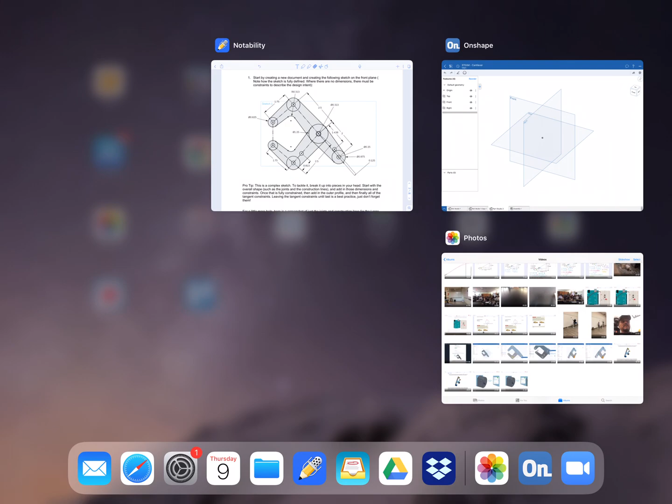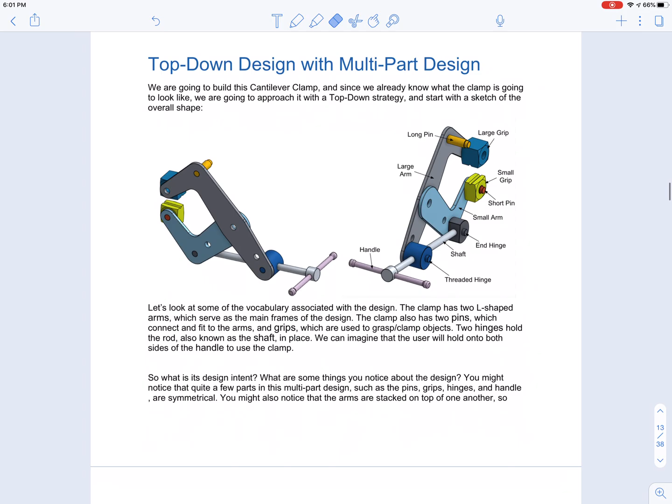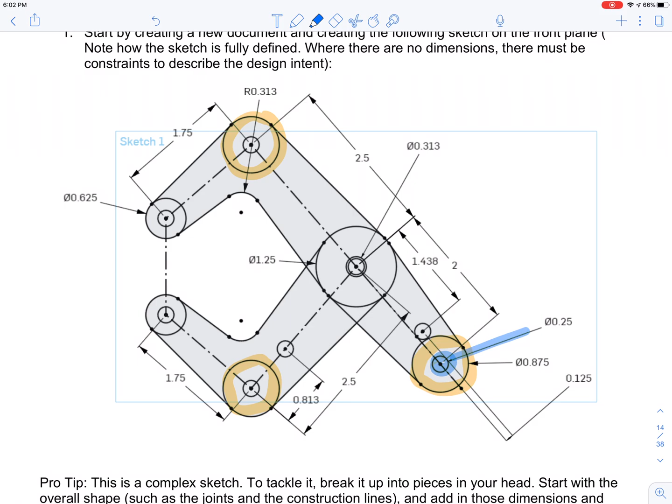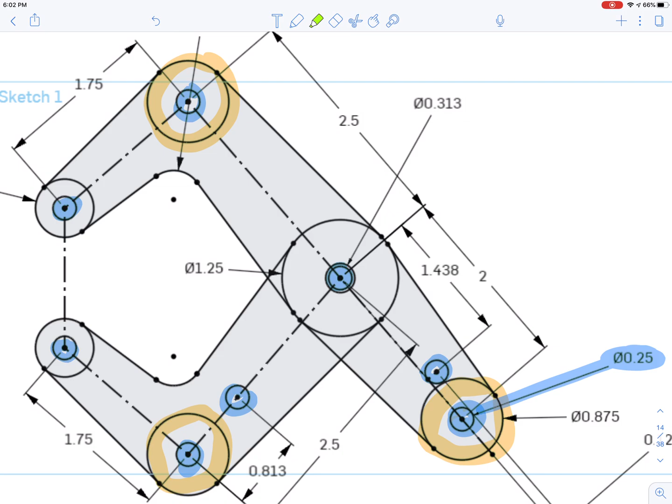As far as the smaller circles, this circle right here has a dimension of 0.25. But there's a bunch of other circles that do not have the diameters, but they're going to be the same size. This one, this one, this one, and you see that there are two circles here. The inside circle is also 0.25. The outside circle being 0.313, and that's that circle right there.

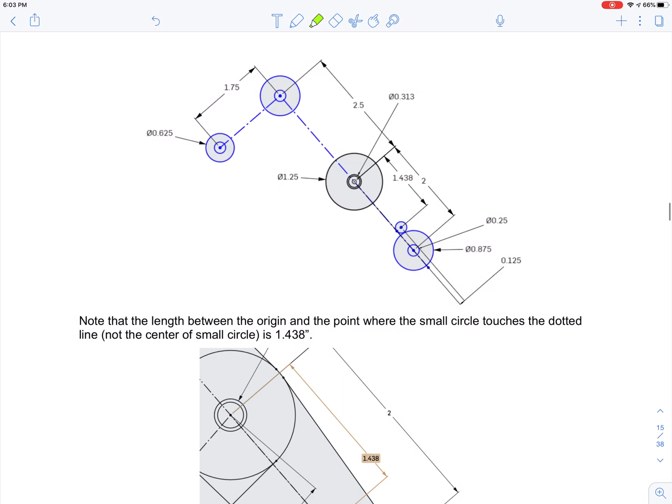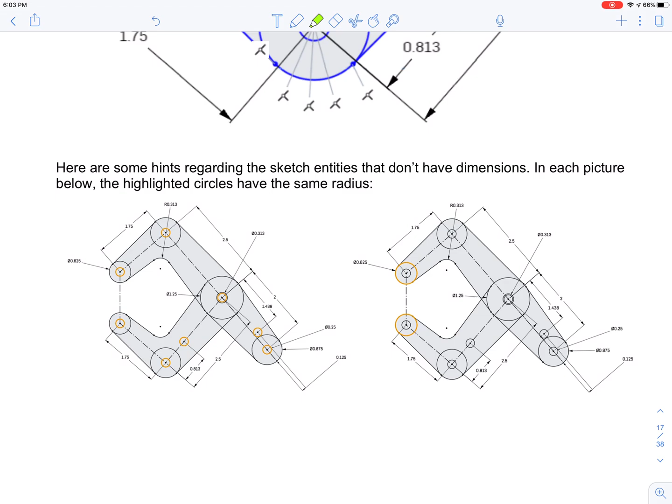If you find it difficult to notice that, the reason that I know this is because they actually tell you this further up the notes. They give you your dimensions for every little part, and further down they tell you, hey, if you didn't notice that, these are the circles that are similar to each other. You don't want to set the dimensions for each circle, because you're going to end up with a screen with a bunch of dimensions on it. Just set up the dimensions for one of the circles and then make the other circles equal in size to that one circle you dimensioned. I'll show you how we're going to do that.

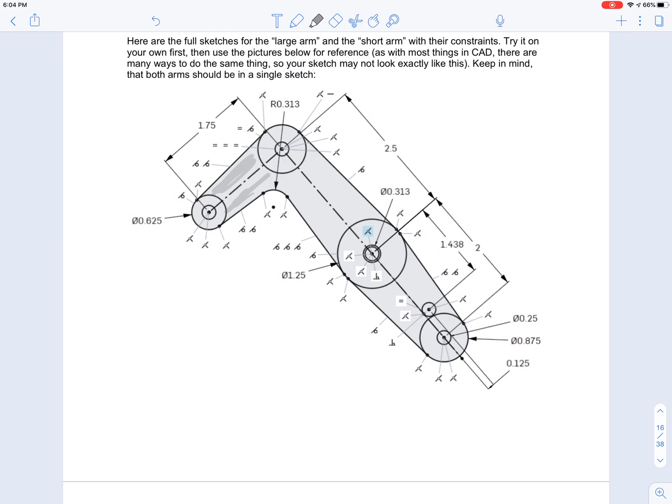One of the other things that they show you here, besides the distances between each of the parts, is the constraints. Your constraints have to be the right type of constraints for your drawing to work, because you can actually move the different parts, and I'll show you how to do that. You'll notice that if you don't do it right, then the drawing is going to get distorted. If you close out the drawing the right way, it should have that shade of gray that you see here. You should get that if your drawing is a closed drawing, and your lines will either be blue or black if your constraints are adequate.

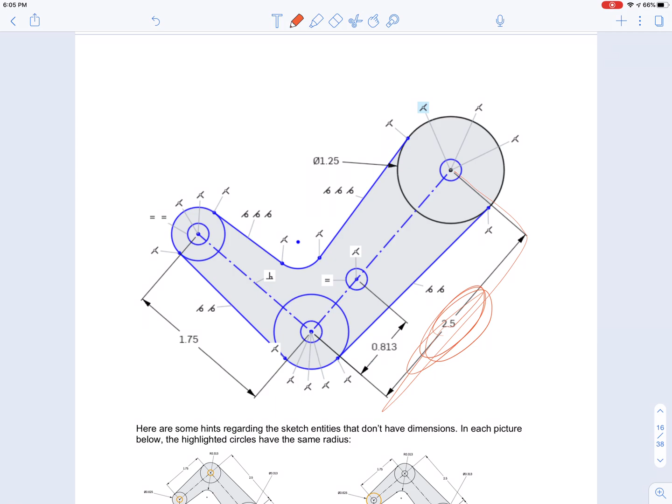If you're telling it to do two things that are opposed to each other, for example, you tell this to be attached to the midpoint of it, but then you tell it to be at this distance from the edge. The midpoint of this line is not 0.813 away from the edge. The midpoint is going to be here. So if you tell Onshape to put this circle at the midpoint of this line, and then you tell it this over here, it's going to turn red because it can't do that. Especially if you also tell it that this line needs to be this length. So those are things that you've got to keep in mind. When your constraints are going up against each other, you'll get a red line.

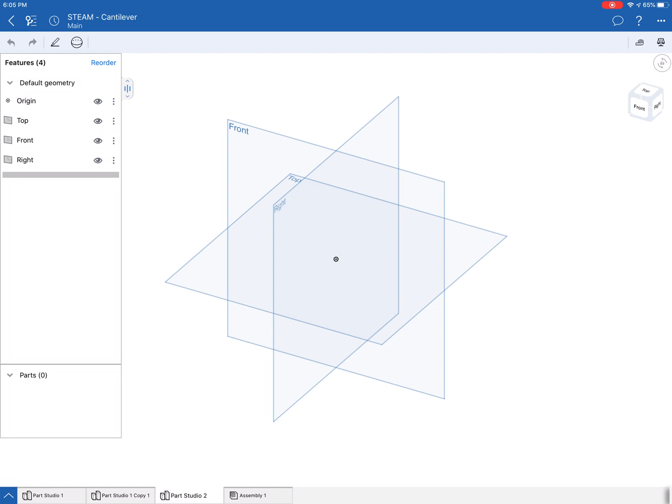Now, let's start our drawing. First thing I'm going to do is click on Sketch over here in the top left, the Sketch menu. It tells me select a plane. Now, to do this, I can either click on the front plane itself on the screen, or I can go to the menu on the left, the Features menu, and click on that, which is what I'm going to do. It immediately selects your sketch, and it asks you, what do you want to do?

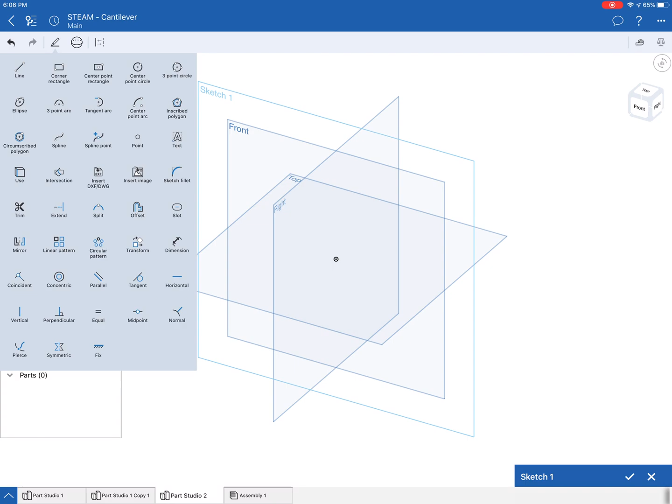I want to draw a circle. It's going to be a bit awkward for me to draw, but I can still do it because I want to start the circle at the center point of the origin. The origin is that point in the middle. So I can click on that, and then draw any diameter I want. It doesn't matter because I'm going to change it.

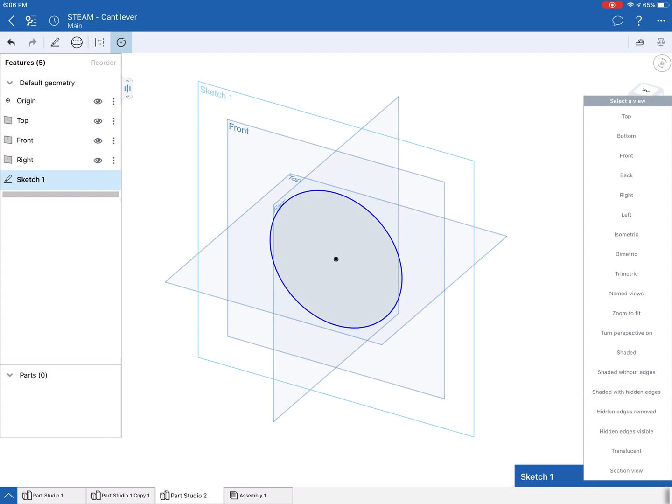It would be awkward to draw it like this, so what I'm going to do is get the front plane to face me. If you're on a desktop or laptop, you can manipulate that cube on the top right so the front face faces you. If you're on an iPad like I am, you can click on that and then click front, and it automatically sets up that way.

Now this little top circle to the top right that I'm going to click on is going to turn orange. That allows me to actually move stuff here without tilting the plane. So I have that circle. Now if I click on that circle, I can actually change its size.

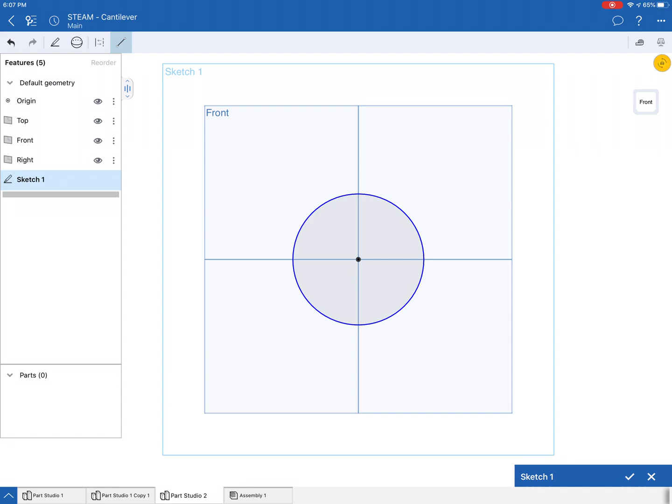Now what I'm going to do is draw a line. I'm going to draw a line, and my line's going to look like this. It's going to go from here to here to here. Just want to draw a line.

Now I'm going to unclick line because I don't want to draw another line as I'm changing this. I need this line to go from a regular line to a construction line. So I'm going to highlight it, and then click construction, this button right here. I'll click that—boom, my line's a construction line. Now I'm going to unhighlight it by just clicking away from it.

Now there's a couple of things that need to happen. I need to attach that longer line to the center of that circle, and I need these two lines to be perpendicular to each other. It doesn't matter in which order you do it, as long as you do them.

I'm going to set them perpendicular to each other first, so I click that line and this line. Then I click the sketch menu and click perpendicular down here. Boom, now they're perpendicular to each other.

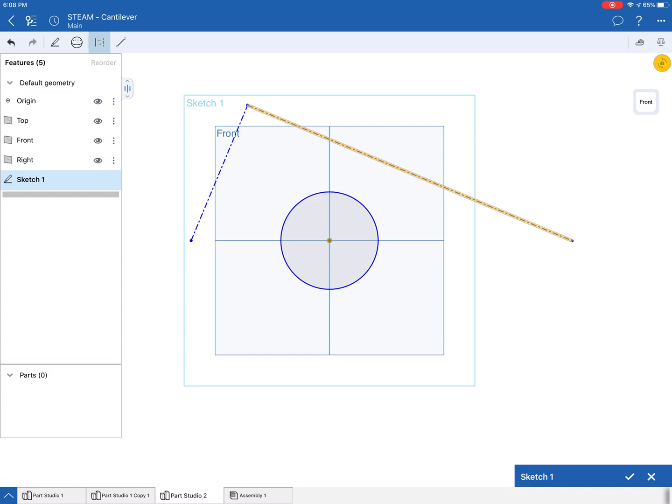Now what I want to do is make sure this line is going through the center of that circle. So I click that line and I click the center of the circle. Then again I click sketch, and now I click coincident. Boom—notice what happened there, right?

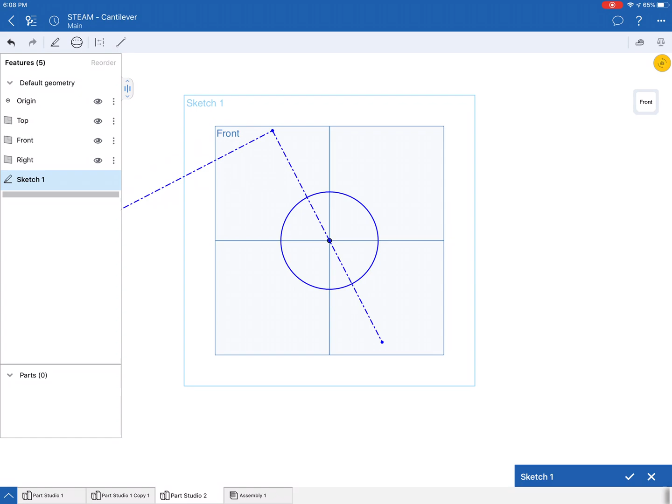Now I can manipulate this line. I can change all these different things and do all sorts of things here. It doesn't matter the size and all that, because I'm going to change that as I go.

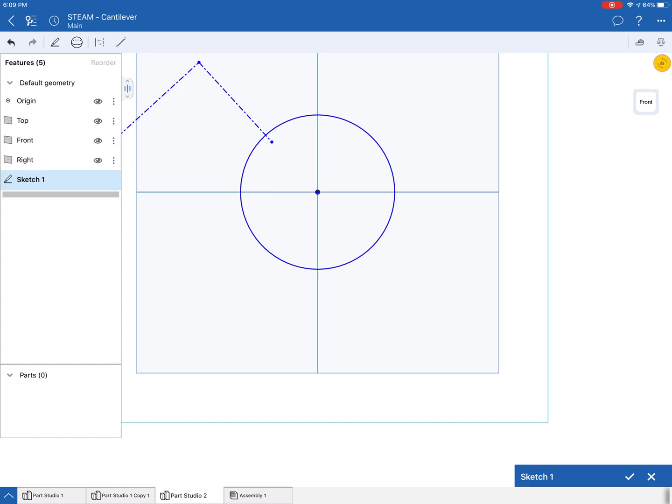So alright, I have that right there. Let me edit it a little bit. I'm just going to stretch this line over here like this, stretch it over here like this, and push it up—just creating some separation there.

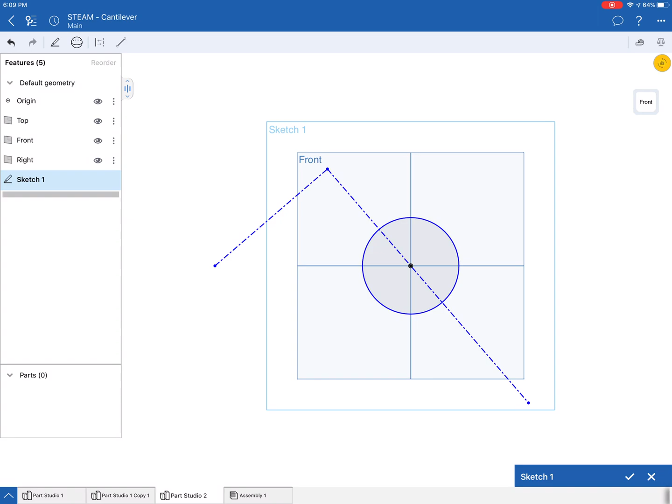Now I'm going to draw my circles so that they look something like this. I'm not going to focus on the size of them yet because I can change that later. So I'm going to click here, click center point circle, and begin drawing my circles.

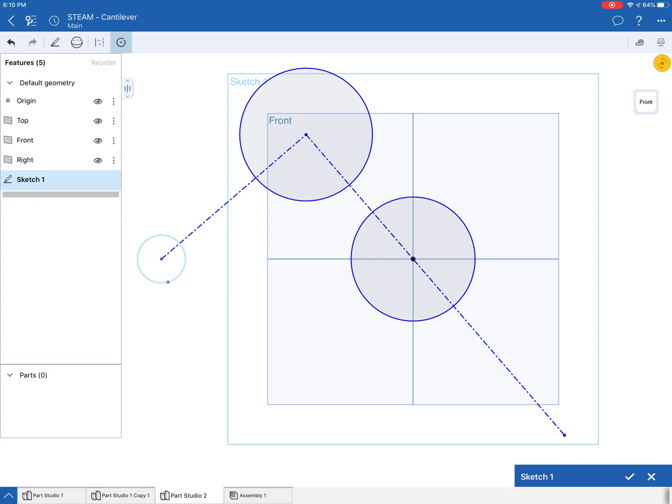I'm going to draw my big circles first—that's 1, that's 2, that's 3. Now I'm going to add my smaller circles. There are 2 circles in here, one here and one here, and then there's a random circle floating in the air over here. Okay, now I'm done with those.

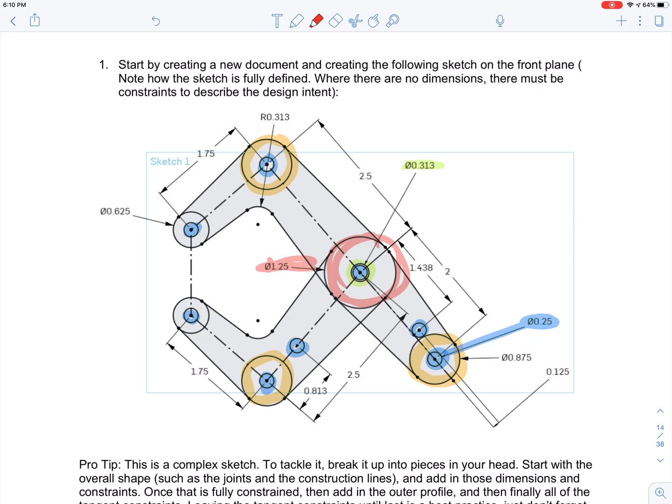Alright, now what I'm going to do is set the sizes of my circles. We have this base circle right here, the original one, and that's going to be 1.25. So I'm going to click on sketch, click on dimension, and click on the circle, and now I have this over here.

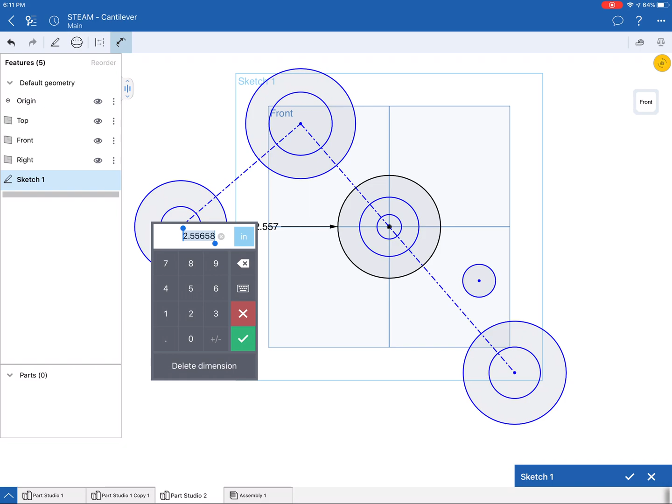I'm going to click on the numbers here, and that should pop up—it should be 1.25. Click OK, and that's all of it, that's going to change.

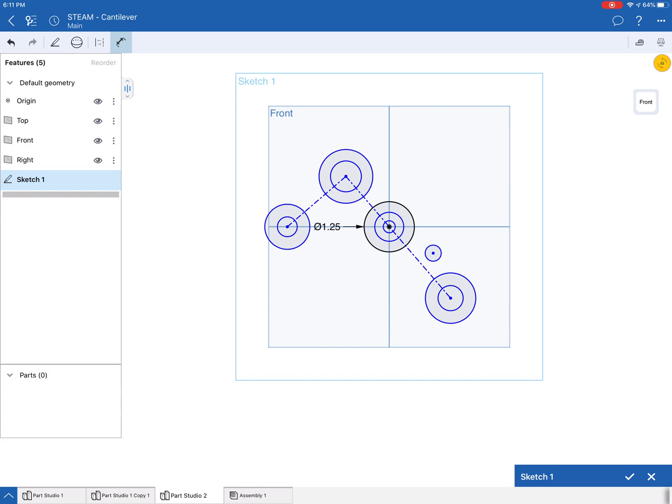All right, so now I have that dimension set. I'm going to work on the smaller circles now.

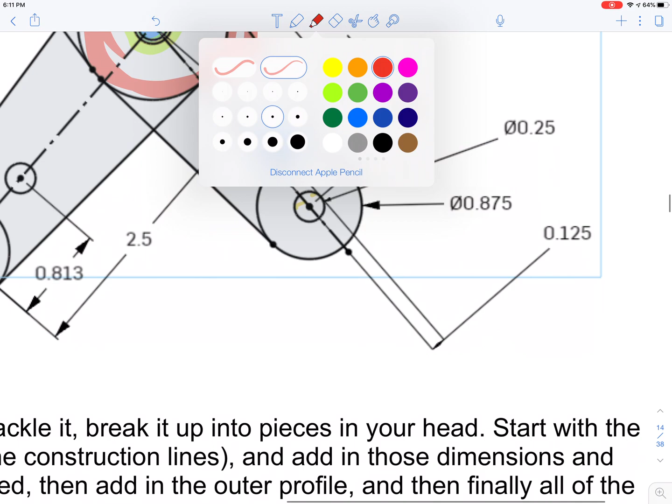As you see, the dimension still clicked up here, and I'm going to click on this one. Now this dimension has to be, let's click on this over here. This is supposed to be 0.25. So again, I'm going to click on that, click on the numbers, and it's going to say 0.25. Boom, right away. Once you click that, you see the dimensions turn black.

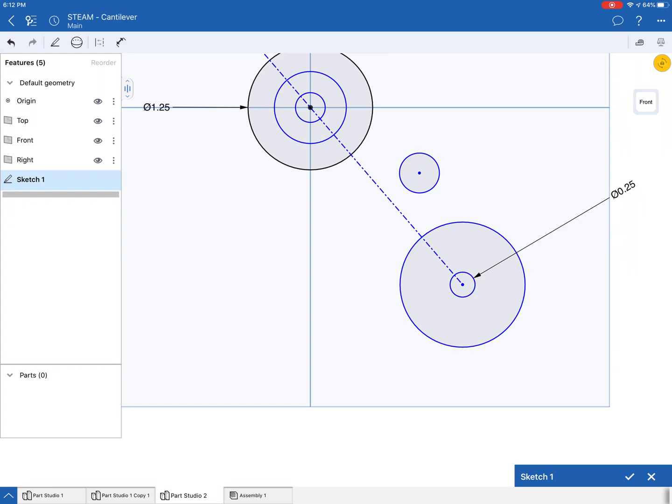I can manipulate that and move it anywhere I want. I can get it out of the way. And I'm going to change my other dimensions.

How am I going to do that with the smaller circles instead of clicking dimensions every single time? Well, I have those dimensions set already. So what I'm going to do is click on that circle and any of the other circles that I want to have the same dimension. Then I'm going to click on my sketch menu and press equal down here. And boom, automatically they turn the same size.

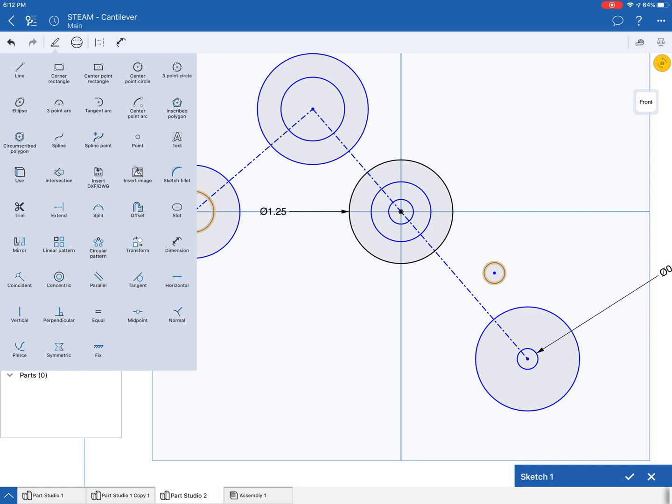Now I can click on this circle and this other one right here instead of clicking the original one, and again set them equal to each other, boom. And I'm going to do that again. This and this equal. And then the small one here with this one, and they're going to be equal. Boom, done.

Now I have my small circle set up. This one over here, I know this because I've done this a bunch of times. This dimension over here is supposed to be 0.313. Boom. You see, now it looks like our drawing over here. Okay, and that's what we're aiming for right now.

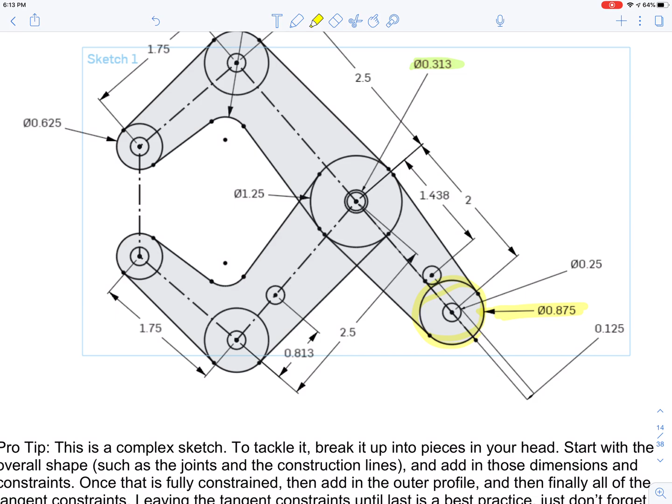So the next one that we're going to set up is this circle over here. The 0.875, which is going to be the same as this. And then afterwards, we're going to do that one over there. So 0.875, I'm going to click on dimensions, and I'm going to click on that circle.

And I'm going to click on that, and the number is 0.875. Okay, boom. Again, I want this circle to be the same size as this one. So I go here and I click equal. Done. Oh, and I made a mistake.

So I clicked on those two circles, and I got this dimension over here. I'm going to unclick it because I don't want that dimension. All right, now this circle over here, I want the dimension for the circle. So this is going to be, I click on the numbers, 0.625. Boom. And you know what?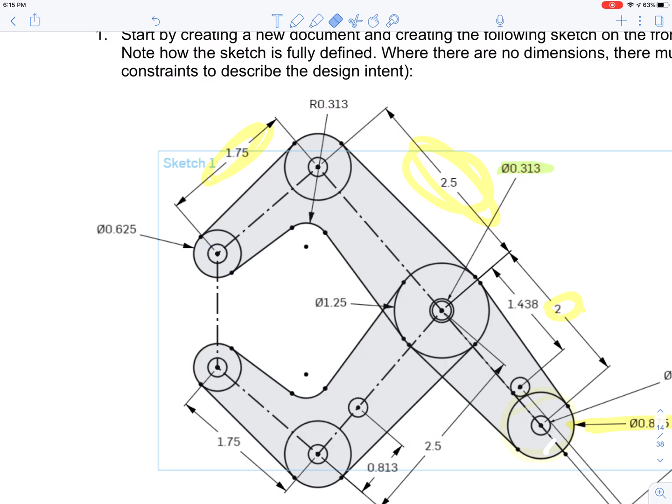So now, again, click on distance, and I'm going to click on the center of the circle and the center of the circle, and okay. Click on the number, it's going to say 1.75. Okay, boom. And now I can move it up and down.

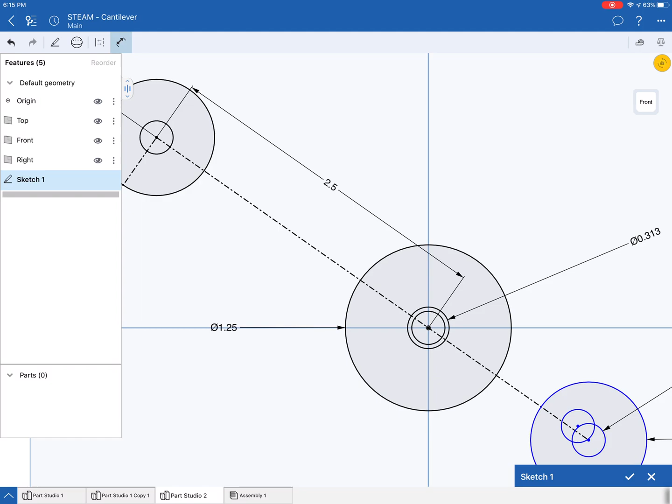I can put it wherever I want. Again, the dimension tab is still highlighted. I'm going to click here and here. I'm going to go up. I'm going to put it there, and I'm going to click on the number. I'm going to say 2.5. Boom. Set. I can move it wherever I want.

Now I'm going to do these two. Let me click this. I'm going to move this away so I can click on the right thing, and I'm going to move this circle out of there.

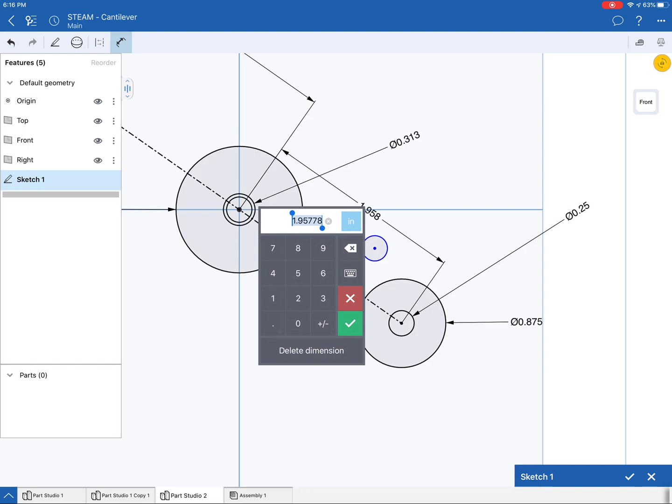Now the distance from the center to here, I'll click dimension and set the number to 2. It was almost that size. Then I'll bring it up so they're about the same position. You can fix that later, it's not that important.

I'm going to move this out of the way. The other thing I need to do is make sure that blue circle rests on that line. First I'll unclick dimensions, then click the circle and click that line, and now click sketch and coincident, which is this one right here.

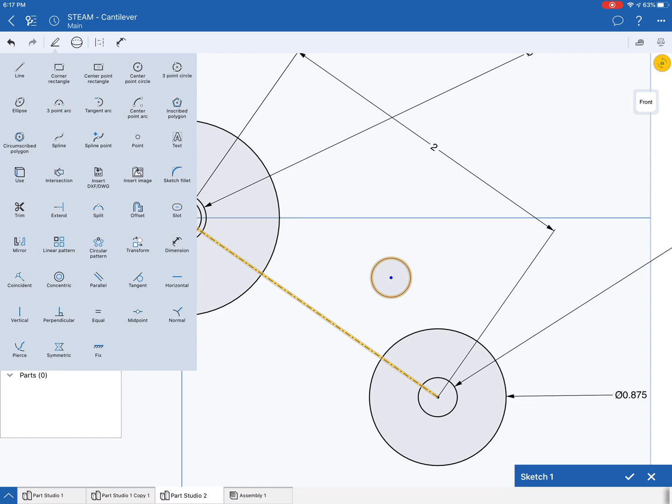My bad. I'm going to click the circle, click the line, and click on tangent, not coincident, tangent, which is this one right here. If you're taking geometry, you should know that tangent touches a circle at just one point.

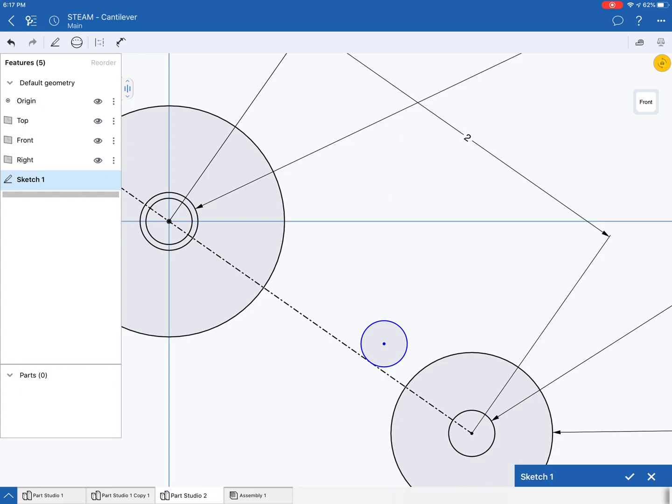So if I move this circle around, it's just going to be on that line. Had I not set it equal to the other circle, I could also change its size and it would still touch that line, but I can't change its size right now because I set this circle equal to the other one.

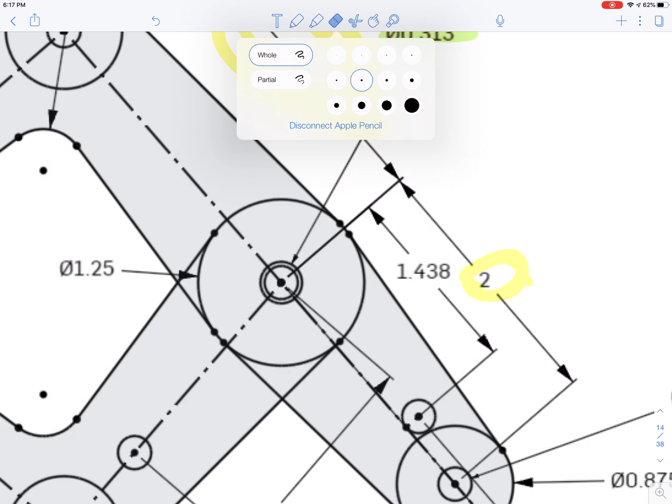Another thing I need to do is set the distance between this circle and the big circle over here, that blue circle and the original circle. I need to set it to 1.438.

There's a little trick here, you see this point I'm highlighting. I'm going to add that point. I'll click on sketch, find point, which is this one, and click around that area. It should immediately snap to it. That is my point of tangency, and it's immediately attached itself to it.

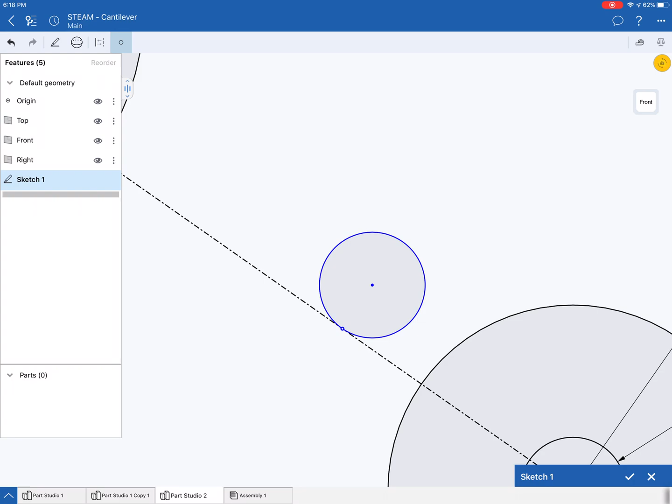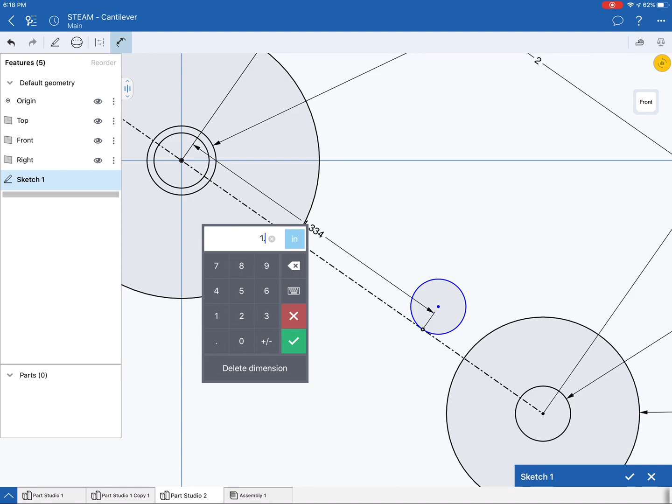Now I'm going to click dimensions again, click the center of the big circle, and click that point of tangency. Click the numbers, and again I'm going to check it's 1.438. So I'll set it to 1.438. Okay, you see what happened there?

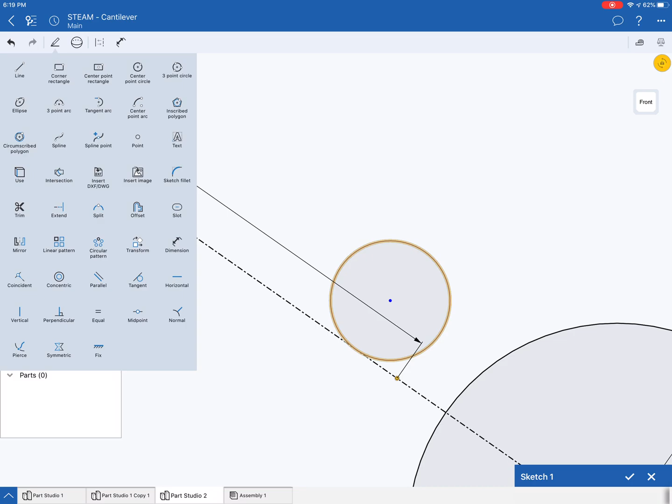The point moved, but not the circle. So now I'm going to attach this to this point. To do it, I'll click away from dimension, click this on point, and again click on tangent. Okay, not tangent, coincident. Sometimes there's a bit of trial and error. There you go, coincident worked.

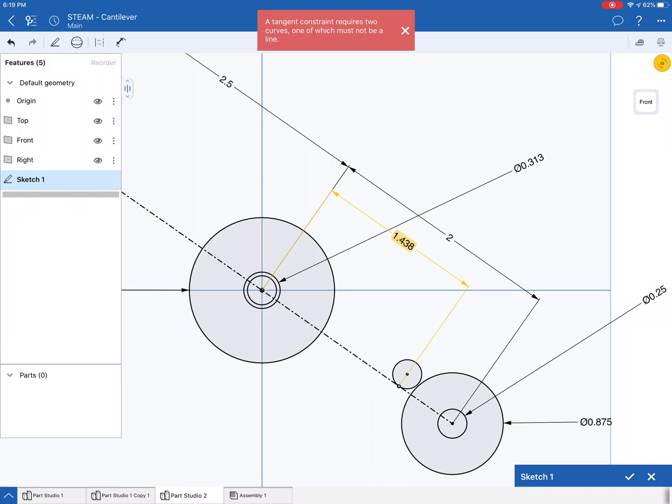So now our circle is at that distance, and I'm just going to move this out of the way so it's not part of the drawing. Okay, so now my circles are drawn.

Now what I need to do is build the rest of my arm. I need to build the actual body of the arm. So that's what I'm going to do.

One of the things you need to understand is that these lines are all tangential to the circles, even these to this circle right here. So I'm just going to draw the lines. As long as they're attached to the circle, it'll work. Then I'm going to draw the lines and ask them to attach themselves to the point of tangency, and automatically they're going to go into this mode.

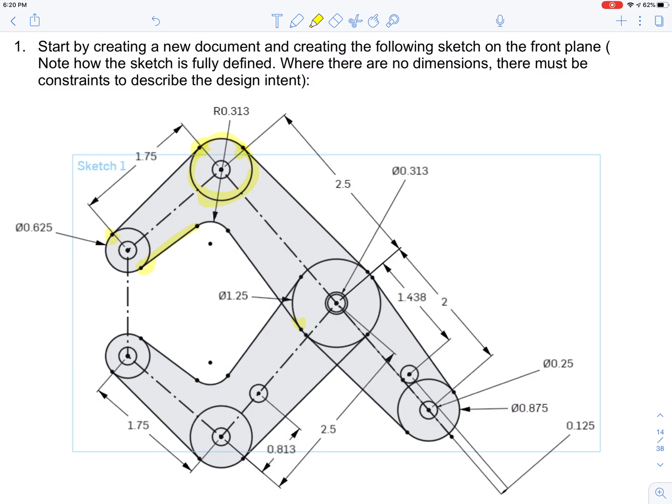Obviously this line over here is going to look more like this, just a straight line. I'm going to have a straight line here, you'll see, and then I'll fix it so that it looks like it's curved. Okay, here we go. Also, you'll notice how the inside of it is going to be shaded gray, just like these. As you can see, my circles are black because everything works out fine, right?

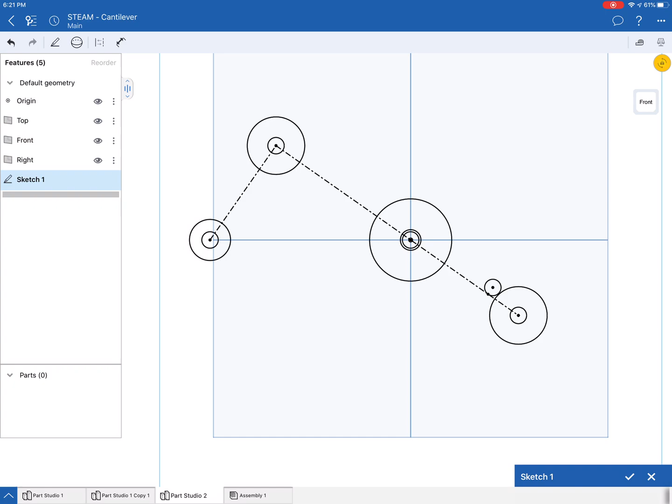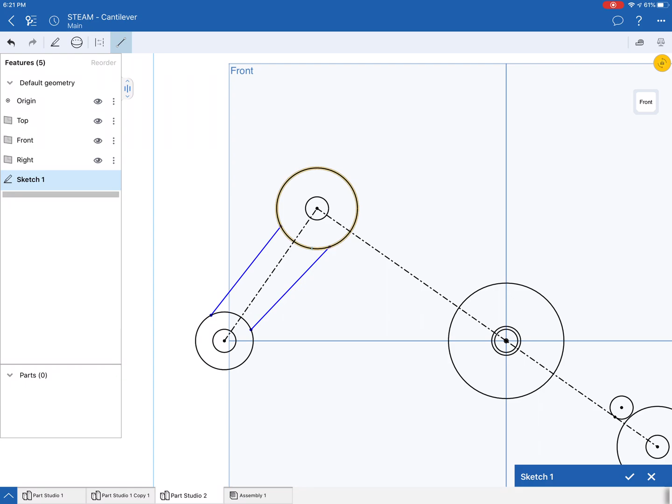Okay, what's happening here? All right, so now, I think I was asking it to do something. Okay, let's see. I'm going to draw my line. So I'm gonna click here, and I'm gonna click here. Oh wait. So I'm gonna have to unclick the line every time I draw a line. Here, here, unclick line again, here, here, unclick line, click line, here, here.

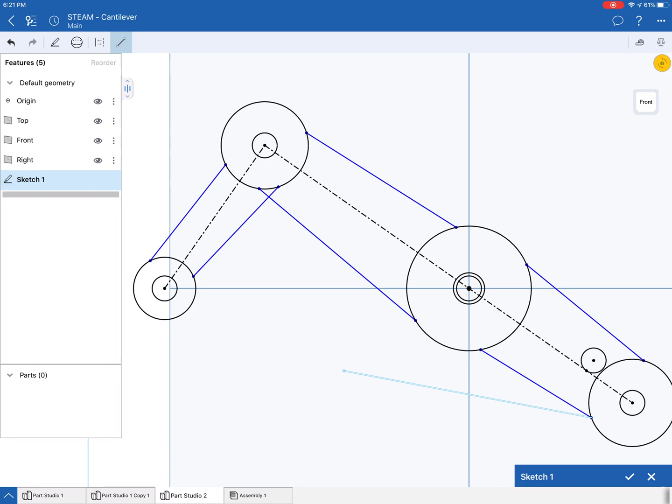Okay, so now we have our line set. What we gotta do is we have to make sure that my lines are tangent to my circles. So I'm going to unclick line. See, I forgot to unclick it on time, so it drew that extra line. I'm just gonna backspace one. Okay. So now I want these lines to be tangent to the circles. So what I'm going to do is I'm going to highlight my line and my circle.

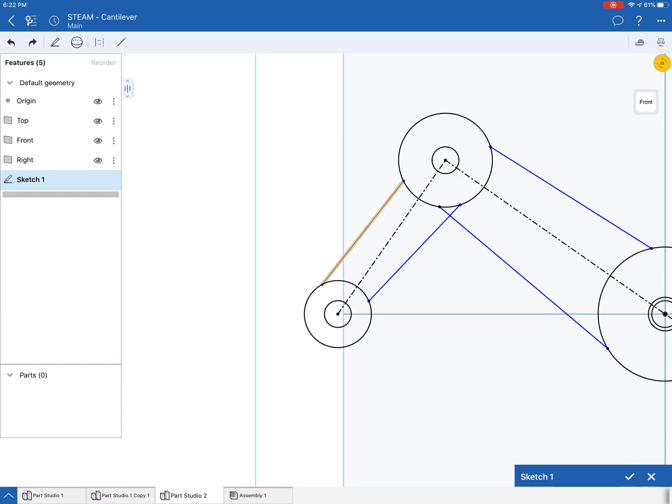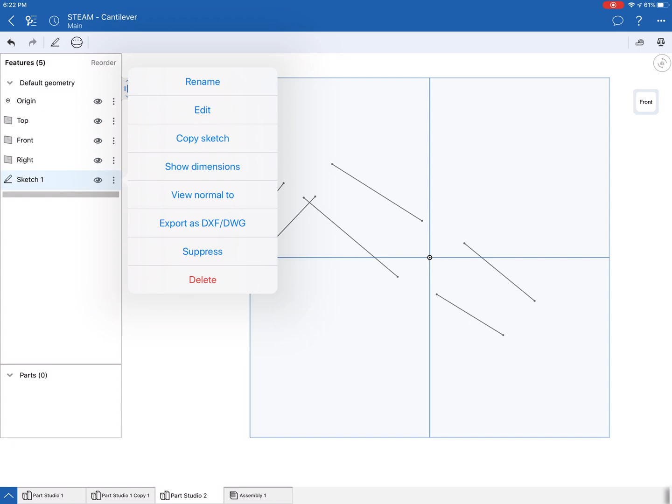It's not letting me do it. Why is it not letting me do it? Okay, that's not good. I think I clicked out of it by mistake. Okay. Yeah, that's not good. Edit. Okay. Let's see. Let's do this. Circle and line. You see what happened? For some reason, it was not letting me click on the circle and the line at the same time. So all I did is I okayed the sketch, and then I'm editing the sketch.

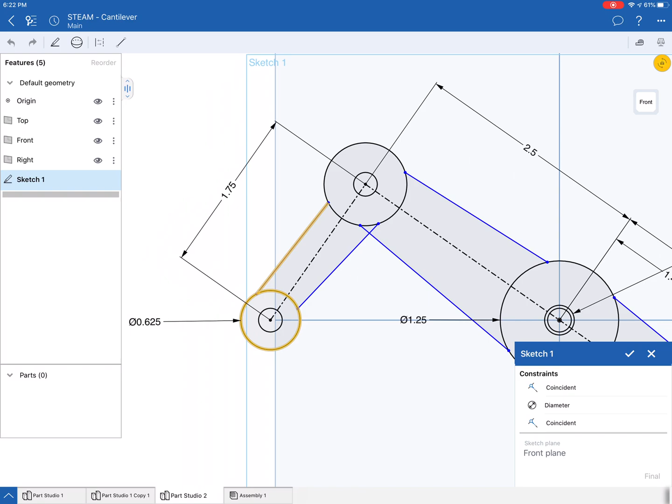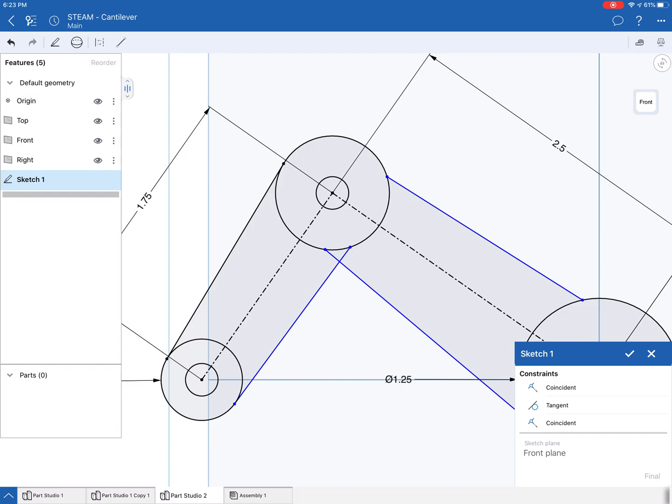So now I click the line and the circle, and I'm going to click on that sketch menu. I'm going to click tangent. Automatically my line shifts. I'm going to do the same thing for the other side of the line. Click the line and a circle, and again, tangent. Boom, the line moves. I'm going to do the same thing for all the lines. All right? Line, circle, tangent, moves. Again, line, circle, tangent, moves.

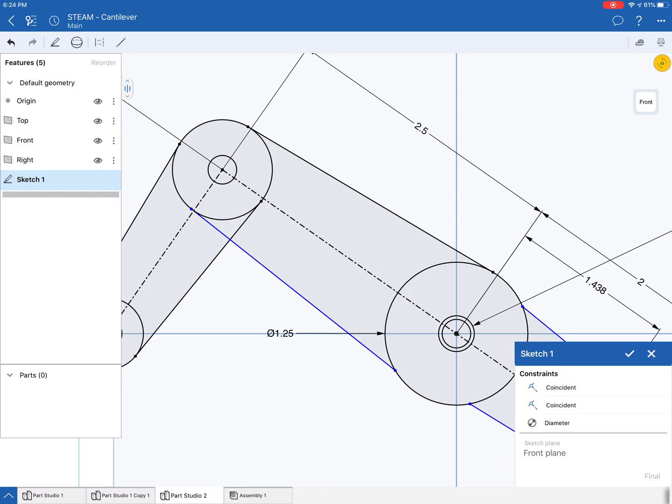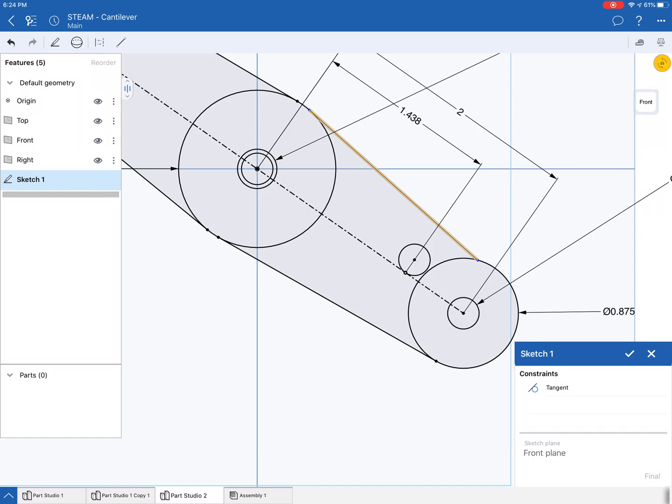Circle, tangent, line, circle, and tangent. And you notice how my lines turn black? That's a good thing. Again, wait, I don't want to click a line. I want to click line, circle, and I'm going to click tangent, line, circle, tangent. Again, two more. Line, circle, and tangent. And the other side, line, circle, tangent, turn black, line, circle, tangent, again, line, circle, tangent, boom.

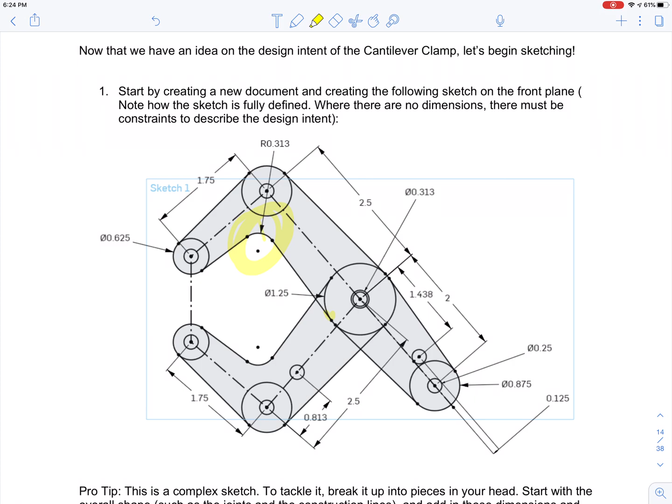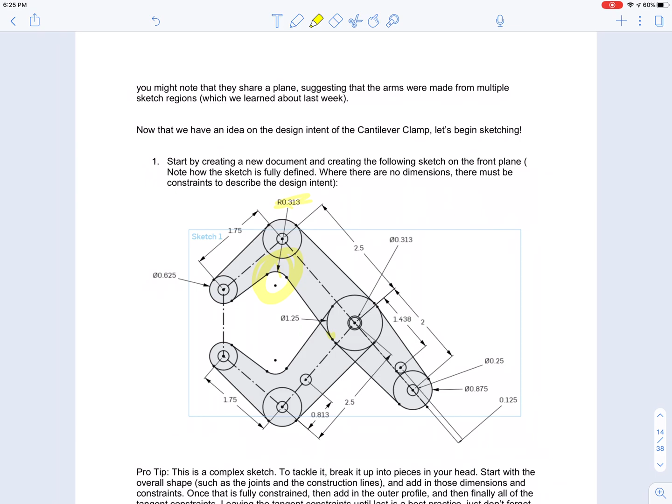Now all my lines are black, and you notice that the inside of my arm is shaded gray, because that means that all the lines are closed. The only thing that I have left to do is this portion right here in the middle, which I'm gonna do right now. If you scroll down here, where is it? My radius is 0.313, and it tells you over here, and I'm gonna fillet that. So I'm gonna go here, boom.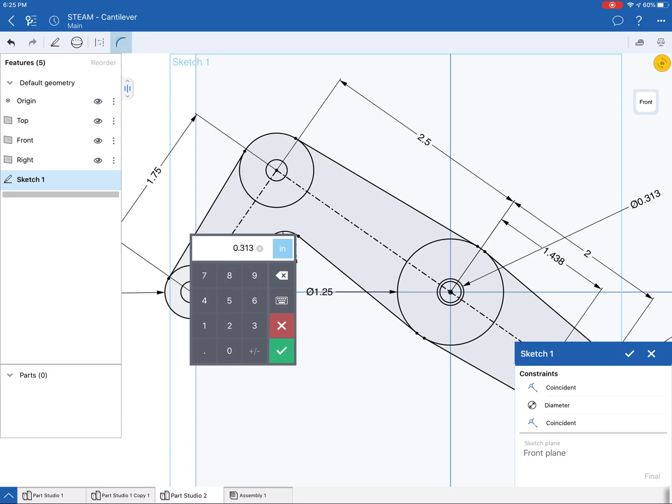All right, now I'm gonna click here, and I'm going to go into sketch fillet, not chamfer, sketch fillet. I'm gonna click that. Now I'm going to click my two lines. I'm gonna click here. I'm gonna click here. Automatically, they're going to curve into each other. So now I have to give it the right radius, 0.313. Boom. I'm done with my arm, and that's my radius right there. I click OK, and your arm is set.

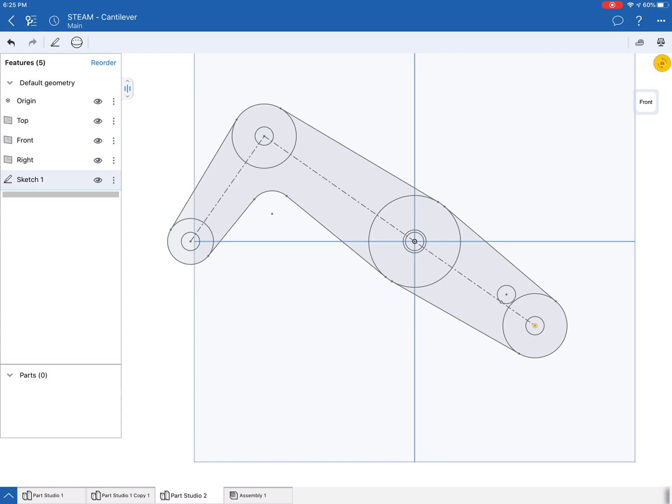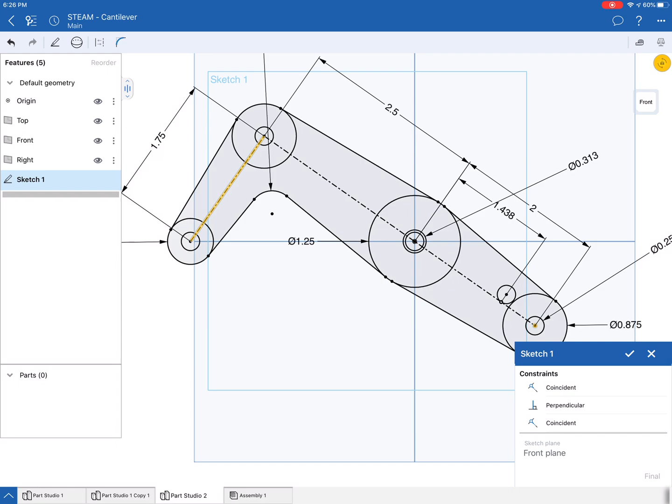Let's click front again. Lock this up. Now, if you click on this, you should be able to move it. Oh wait, I need to open the sketch for that to work. Edit. Okay, now I'm gonna click on that. I'm gonna move this. Come on, don't let me down. It's not letting me do it for some reason. Anyhow, you should be fine with it. But that's your arm right there. We're going to draw the smaller arm on the side, and then we're going to reattach it. Anyway, that's a good job.